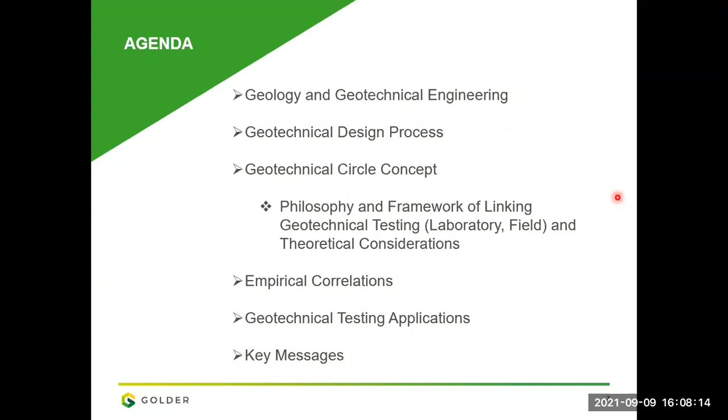So the presentation will first talk about the role of geology in geotechnical engineering, quickly discuss the geotechnical design process, in particular a concept I call the geotechnical circle concept, which is a framework linking geotechnical testing, whether in the laboratory or the field, along with theoretical considerations. I'll provide some thoughts with regard to empirical correlations, present some geotechnical testing applications, and end with key messages that I'd like you to take away from this evening's presentation.

Almost 90 years ago, Karl Terzaghi wrote in a paper that it took him two years of strenuous work to discover that geological information must be supplemented by numerical data, which can only be obtained by physical tests carried out in the laboratory. I think this is one of the first statements on the importance and role of laboratory testing, but I would also extend that into field and in situ testing.

Karl Terzaghi and many other geotechnical pioneers always based their work on the background of geology, and they stressed the importance and necessity of linking geology and geotechnical engineering.

Another example is Robert Legget's book from 1962, Geology and Engineering, in which he discusses the important interrelationships between geology and geotechnical engineering. If you've not had the opportunity to read this book, maybe not all in its entirety, but certainly some selected sections, I think you will find it to be a very interesting and informative read.

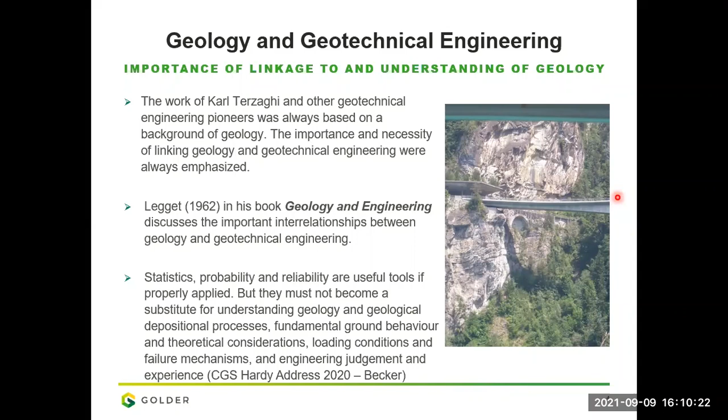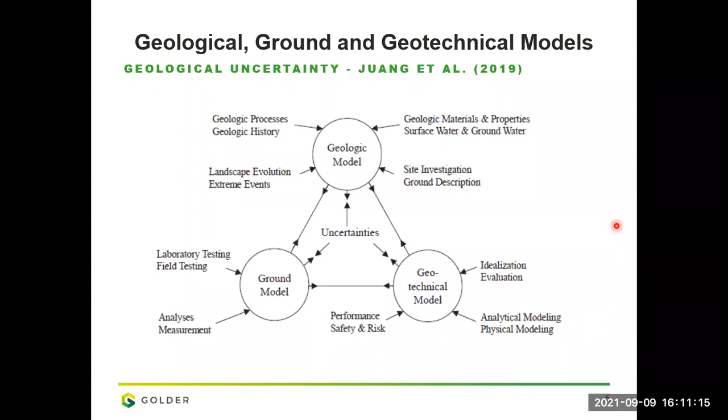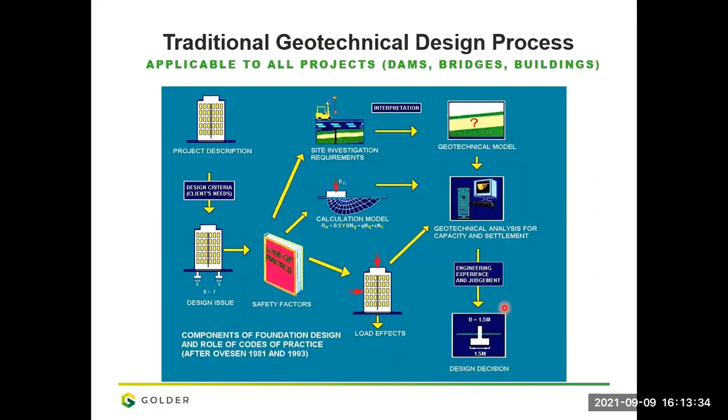And when that input is put into your analysis, etc., and you get a result, you apply appropriate engineering experience and judgment, and you will then select the appropriate design parameter, or what the design would be—in this case, a footing. So testing is embodied in the design process.

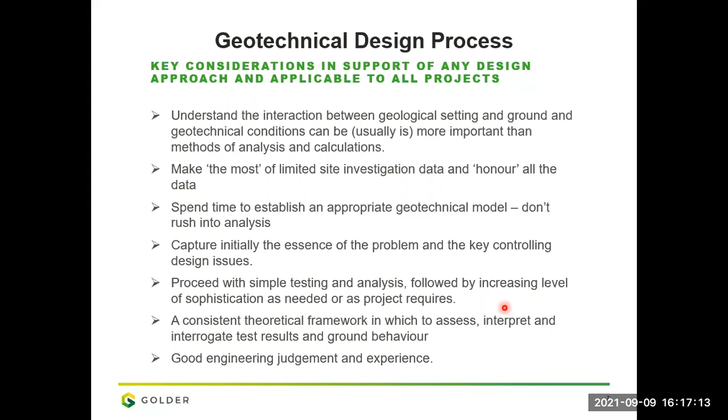interrogate your test results. And then finally, good engineering judgment and experience is always important. Because as they say, good judgment is usually the result of experience, and experience is frequently the result of bad judgment.

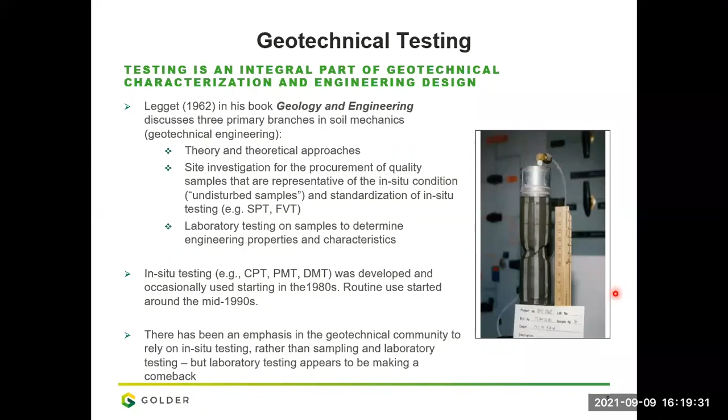I think people, when I say people, us in the geotechnical community, are realizing and reestablishing the value of high quality laboratory testing.

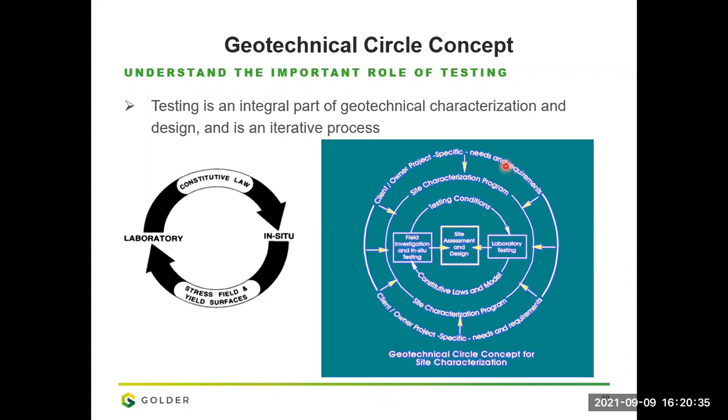Legget's comments about those three branches, the theoretical considerations and that type of thing, fit into what I call the geotechnical circle concept, where you have a relationship between laboratory testing, constitutive laws, results of in situ testing and theory, and then the results feed back in an iterative or circular approach. Or another way of looking at it is like layers of an onion, starting from the outside, working in, understanding the project needs, developing a site characterization program, and then setting up testing conditions that feed into field testing and also into site assessment and design.

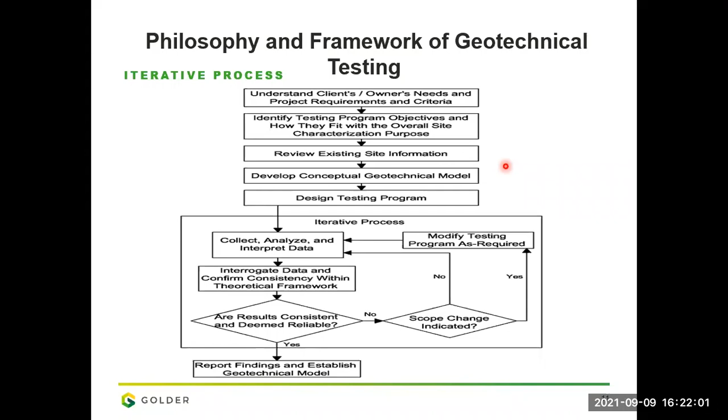I have a few key messages about what I consider constitutes a meaningful or value-added test program. The first is that it's important to understand the advantages and limitations of the various tests, whether they're in the lab, field, or in situ.

The next point is that you need thoughtful and adequate planning based on a good understanding of fundamental ground behavior, working within that theoretical framework. The third bullet is that what you get out of a testing program and how valuable it is, is commensurate with the degree of thought and attention you put into it. Frankly, if you don't put much effort into thinking about it, you should not expect too much back. But if you think carefully and understand the role and purpose of each test, you end up with meaningful program results.

It's important to simulate the in situ and loading conditions to the best and fullest extent practical. An example would be testing in your field stress range, or if your pore water has salinity and things like that, you should try to match that in your laboratory testing.

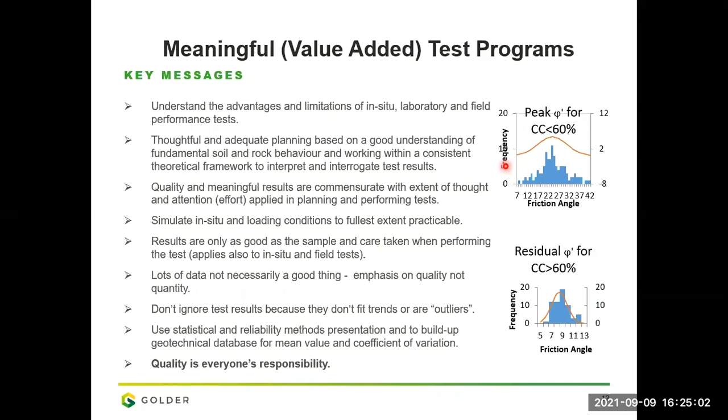I'd like to now talk about examples of testing supporting the development of theoretical considerations and applications in practice. A side thought is that high quality, good test data results stand the test of time.

The first example is the state parameter approach, which I think everyone is familiar with, and it's very important for the fundamental understanding of sand behavior. It was developed in the 1980s with work by Mike Jefferies, who was with Gulf Canada at the time, and then Ken Been and others from the Golder Calgary office.

The key part of this understanding was to make it applicable to the field, and that was developed through the use of CPT, cone penetration testing, where results using tip resistance and other parameters would give you the state parameter. Typically now it's recognized that a state parameter value of negative 0.05 is the boundary between contractive and dilative material. But again, this was developed on the basis of testing and having a good theoretical framework in which to operate and interpret the test results.

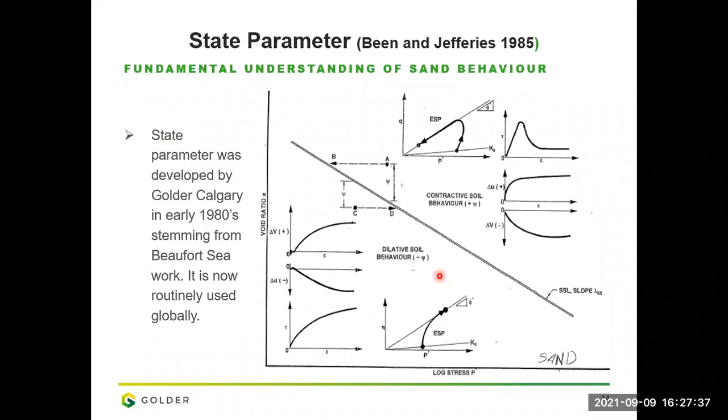Another example is yield envelopes, which provide a consistent framework for assessing clay behavior.

If your stress state stays within your yield envelope, you're in an over-consolidated state. Strains tend to be small and behave more elastically, but once your stress level exceeds the yield envelope and you're on the other side of it, you're in a normally consolidated state with higher compressibilities, a decrease in coefficient of consolidation, and other factors.

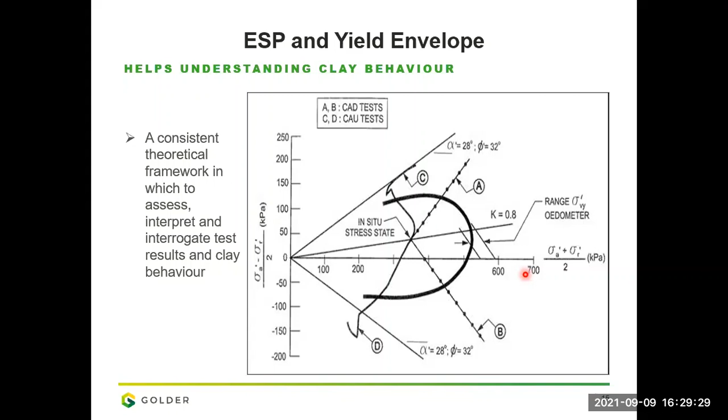If you could track in situ, based on piezometers and other things, and actually develop field stress paths, it goes a long way in terms of understanding your state of stress in the soil and where it is with respect to failure. It's recognized that the average mobilized undrained shear strength is basically controlled by preconsolidation pressure.

Typically for soils, it's recognized that 0.22 times the preconsolidation pressure gives you a good value of average mobilized undrained shear strength. This value came out of the work at Laval with Tavenas, La Rochelle, Serge Leroueil, and others, based on the St. Alban test fills. Mesri, in the early 80s, also theoretically developed a relationship, and his number was 0.23, which is close to 0.22.

This relationship also fits into this equation, which is really the SHANSEP equation, where your undrained strength ratio with respect to effective stress is a function of your normally consolidated strength ratio and OCR.

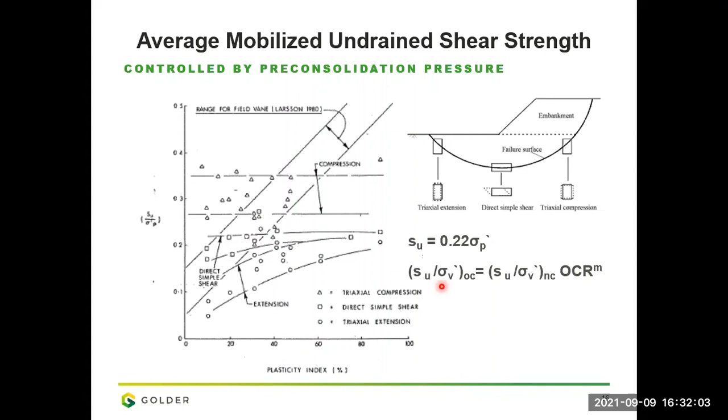Of interest is the field vane test, which trends up and to the right as a function of plasticity index. An important observation is that if you're in the plasticity index range of 20 to 40, field vane tests will be close to your direct simple shear value, which is close to the average mobilized undrained shear strength.

A few comments about direct simple shear testing. Constant volume direct simple shear testing is probably the most commonly used now in state of practice. But it's important to recognize that constant volume direct simple shear tests are not truly undrained tests. Many people, myself included at one point, used to think they were undrained tests, but they're not.

They're a proxy to, or equivalent to, an undrained shear strength, on the basis of constant volume. In most apparatus, pore water pressure is not measured, rather it's inferred based on the change in applied vertical stress needed to maintain a constant volume, and that's taken to be equivalent to the pore water pressure.

This is a bit of a pet peeve of mine. If you're reporting constant volume direct simple shear test results, I sometimes see reports list 'measured pore water pressure,' and people may say, Dennis, don't be so pedantic, but it's important to realize this is inferred, not actually measured. What was measured was the applied vertical stress to maintain constant volume, and through the effective stress equation, that is interpreted to be the pore water pressure.

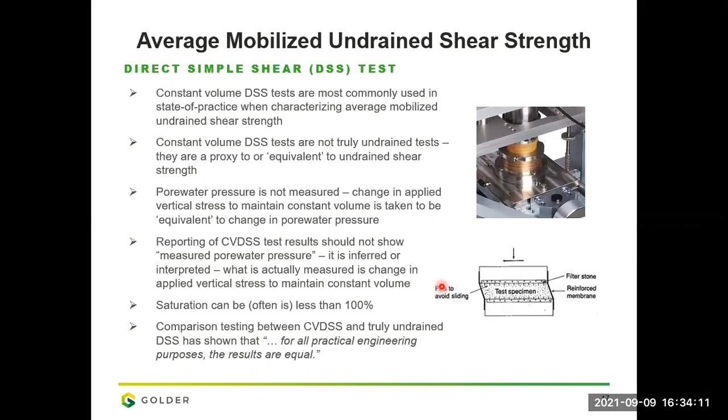I'd like now to share some thoughts about empirical correlations. Geotechnical engineering is embodied with the use of empirical correlations. They're very much a part of our history and tradition, and they're very useful, but you need to understand the basis of development and limitations. I think you should only use those that capture the essence or the first order controlling effects, and that'll become more clear in subsequent slides.

You should have a theoretical basis or a physical understanding of what properties you should expect to be related. Why are you correlating this value with this value? I think it's important to correlate undrained response to tests that are undrained in nature, and same thing, if you want drained parameters, you should correlate them to drained responses. I see many correlations where it's an undrained test and you're going to drain parameters such as effective friction angle, and perhaps the values look all reasonable, but I think there's a bit of a disconnect.

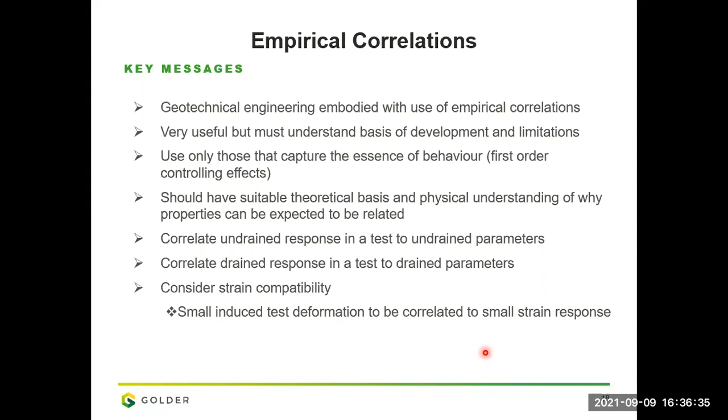It's also important to consider strain compatibility in terms of the deformations. An example of this would be the dilatometer, which applies a very small strain displacement to the soil. I think it's appropriate for values of K0, because it's that small strain. And even though the correlations may be consistent with others for large strain behaviors such as undrained shear strength, you have to keep in mind it's a correlation, and you're using a small strain test to predict or estimate large strain behavior.

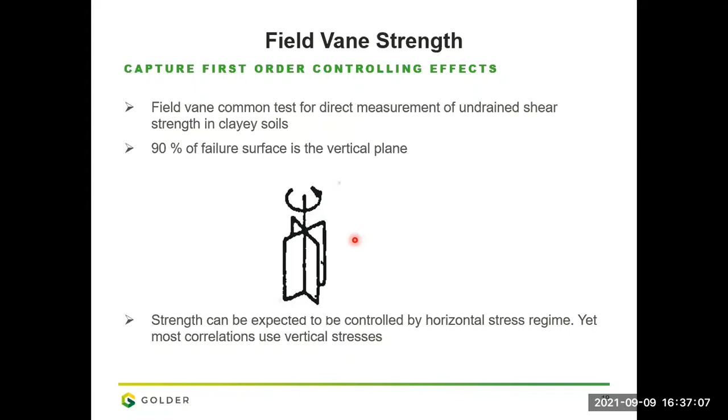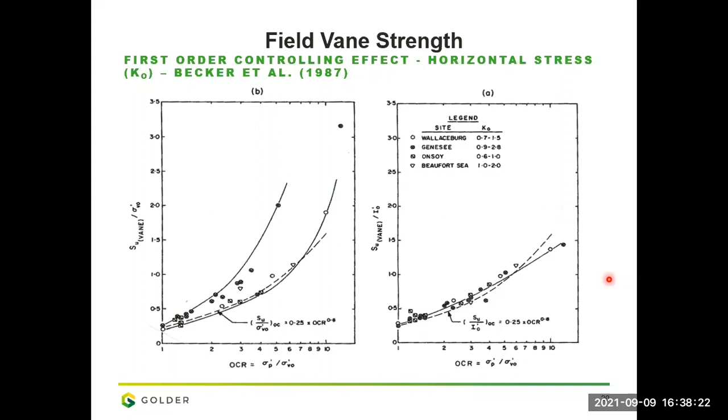But for particular sites where I was able to measure K0, I could normalize the vane strength with regard to mean effective stress, which takes K0 into consideration. When you plot this same test data against vertical stress, and then against mean stress, you get this very tight correlation. I think that is an indication that you're now starting to capture the first order controlling effects, and for the field vane test, it's the horizontal stresses that really are controlling the strength.

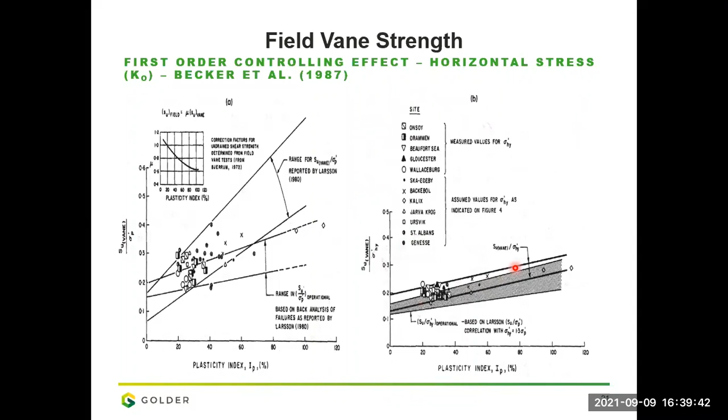So the same plot data here is then plotted on the right-hand side of this plot, but instead of preconsolidation pressure or vertical yield stress, it's in terms of horizontal yield stress. Again, you can see the scatter in the data is very minimal now, which to me supports my hypothesis earlier that it's horizontal stresses that are really controlling field vane strength.

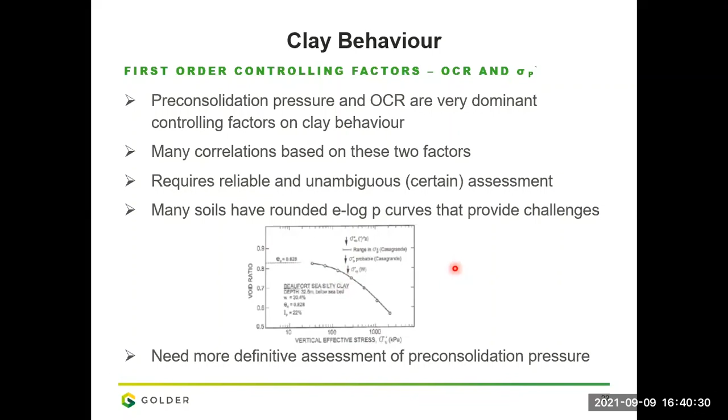Preconsolidation pressure and OCR are very dominant controlling factors on clay behavior, and there's many correlations related to preconsolidation pressure and OCR, but that requires a reliable and unambiguous assessment of preconsolidation pressure. Many soils have a rounded E log P curve, and if you apply the typical Casagrande type of interpretation, it's very difficult to determine the point of minute maximum curvature and estimate the preconsolidation pressure. So you really need a more definitive assessment of preconsolidation pressure.

This work led out of work that we did in the Beaufort Sea in the early 80s, where Beaufort Sea clays had very rounded E log P curves, and it was important to come up with a more definitive assessment. At that point, I developed the strain energy, or the work done on the oedometer test.

It wasn't that I woke up one morning and said, okay, let's do something innovative and unique today. It was rather that I was in the lab. In those days, we did a lot of our own testing, running a series of consolidation testing and triaxial testing. I was reading some papers on strain energy, by Jim Graham and Francois Tavenas and others, and they were determining yield stress in triaxial, which has three dimensions.

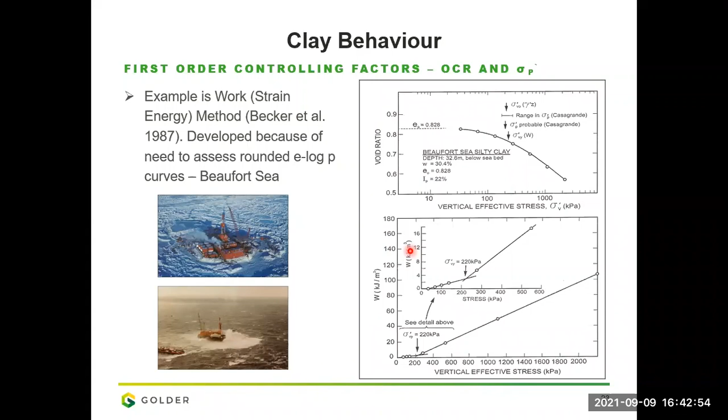Preconsolidation pressure, which is very important when you develop your correlations. I have to say, without trying to blow my own horn, one of the rewarding times in my career was when Professor Charles Ladd at MIT called me and said that they now routinely use this approach in all of their research work. But anyway, enough of that. I'll just say, if you haven't used this approach, I encourage you to do so, and hopefully you will find that it is meaningful and informative.

This plot shows the relationship for a site in the Beaufort Sea, Amauligak, where the squares are the results from the pressure meter testing, and the circles are from the odometer tests on vertically trimmed samples. Now they're not identical, but they show the same shape and profile. Here's an example of an outlier that I couldn't dismiss, so I had to keep it in the plot. But the point here is that just thinking about the stresses, from a practical sense, and using simple laboratory testing, you can get an assessment of K naught.

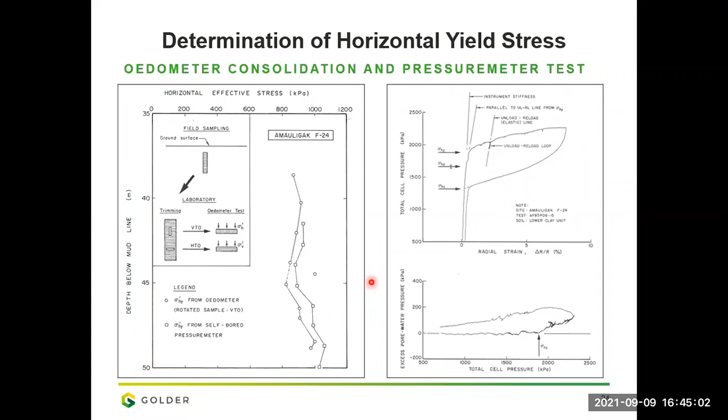It's well known that preconsolidation pressure you can get from tip resistance, the classic equation where the preconsolidation is a function of the tip resistance minus total vertical stress, and typically F varies from 0.28 to 0.33.

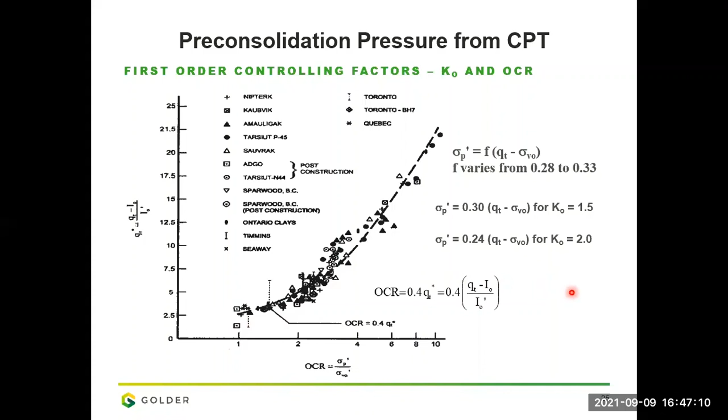This upper value that is typically used and reported in the literature is fine if you have your normal range of K naught. But once K naught is higher, this particular value drops. So this is a useful correlation which captures what I consider the controlling effects, or the controlling orders, of what controls the behavior.

Coming back to the field vane, where we typically come up with an NK factor to use so that you can use your CPT tip resistance to calculate undrained shear strength. I think everyone knows and realizes that this value of NK can vary considerably, from just a bit above 5 up to about 20.

This plot shows it related to K naught. So if you're in your normal range of K naught, you tend to have values that you'd probably recognize in your own practice, values of K naught, values of NK. But if you're working in higher K naught materials, then this NK value can increase.

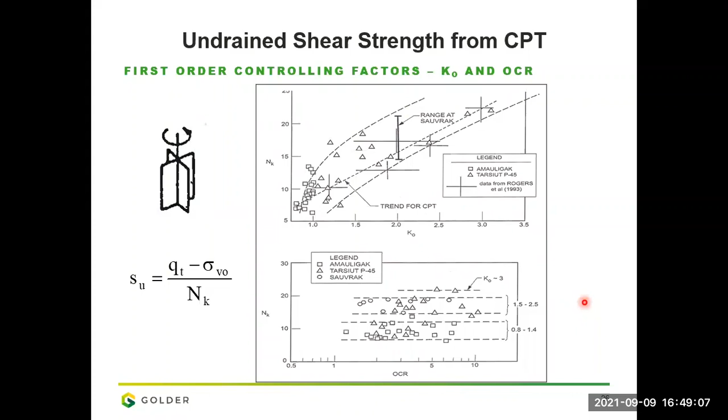The bottom figure here shows the relationship between OCR and NK. It shows that NKT is relatively insensitive to OCR, because all of these symbols are more or less in a line, but these are values of K naught in the order of 0.8 to 1.4. You'll see these are sort of your typical numbers for NKT, maybe 13 or 14, that many of you have probably used in your practice. But again, this is to show some controlling factors with regard to the horizontal stress regime.

So let's talk a bit now about field performance testing, such as full-scale pile load tests and those types of things. This testing is essential for design improvement and to make your design more efficient, especially for what I call geostructural elements, such as ground anchors, piles, and ground improvement technologies. The testing also plays a key part in QA/QC programs.

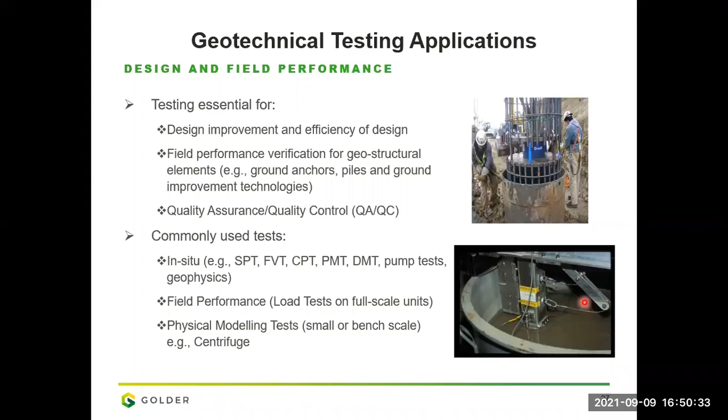The commonly used tests for these are ones we're all very familiar with, but we can add pump tests and geophysics to it. I think a lot of geotechnical characterization programs could benefit from more use of geophysics, not only downhole, but surface seismic waves, to get a better sense of your ground model. Then there's full-scale field performance tests, and physical modeling tests on a bench scale, such as a centrifuge.

For full-scale field performance tests, they provide an improved understanding of the soil structure geostructural system. They certainly provide design efficiency, because with testing you can use higher geotechnical resistance factors in LRFD, or lower factors of safety. But it's important to realize that if you want to refine your design, you really have to take your load tests to failure, so you obtain the ultimate values of the geotechnical parameters for a pile, whether it's skin friction or end bearing.

Because once you know the ultimate value is when you can refine your design. If you don't take your test to failure, then it's really only a confirmation or proof of design test, but it doesn't allow design refinement. It confirms that your design parameters are okay and you get satisfactory performance for the test range stress that you considered, and you'll have a higher degree of certainty doing a proof test. But if you want to refine your design and have the highest degree of certainty or reliability, taking your load tests to failure is the way to do that.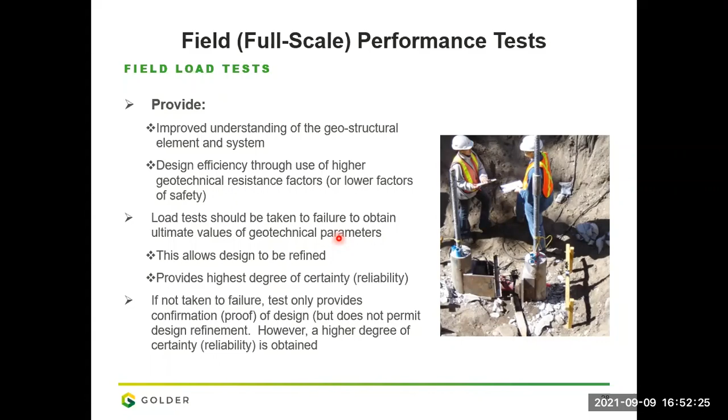People recognize the figure that's O-cell testing for caissons or drill shafts. And the codes, as most people know, allow you to increase your resistance factor from 0.4, if it's only based on static analysis, up to 0.6, and now even higher for full-scale tests. That's a 50% increase in your pile axial resistance. But you have to keep in mind that doesn't necessarily translate into 50% cost savings of the overall system, because there are other factors such as pile spacing and redundancy that need to be taken into account. So you would reduce the number of piles by having a higher resistance factor, but the total cost savings isn't commensurate with the increase from 0.4 to 0.6.

Field performance tests are expensive, but they can provide significant cost benefits. An example of that is the upper part here, without a test. I'm fairly confident with the solid line I've drawn here, but the dashed line reflects that I'm estimating what the ultimate shear axial compression resistance will be. If that's all you do, you'd multiply that by 0.4 to get your design value. Now if you actually did the full-scale test, and in this particular case the measured value is higher, you then get to take 0.6 of that value. So you've ended up with a substantial increase.

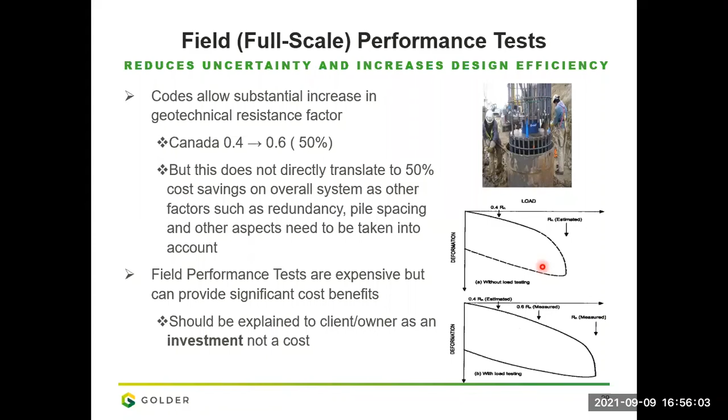And occasionally the results come in lower than what we thought they might have been, and they were disappointed. But even though they were disappointed, they understood that they've done the testing, so now you have to work with that particular result. I make that comment just as a practical thing, because in my experience, a lot of times people do more testing because they feel they're going to get a higher number and therefore their design can be more efficient.

Physical modeling tests are needed because the complex nature of the ground can't be captured sufficiently by analytical and numerical methods alone. They provide an improved physical understanding of the key failure mechanisms and deformation, assist in assessing construction processes and soil-structure interaction, and assist in calibration of analytical and numerical models.

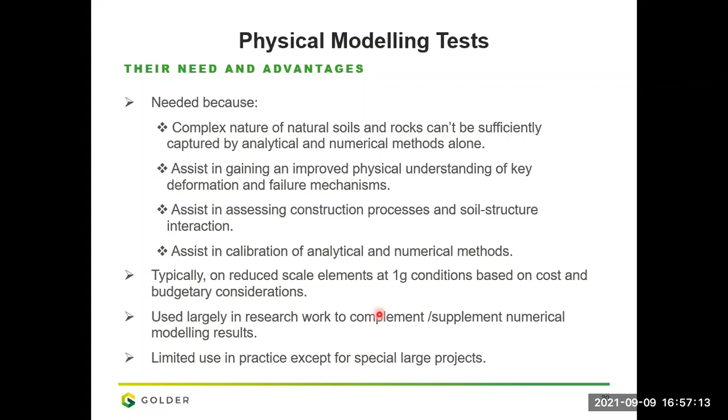Typically these tests are done at 1G, basically because of cost and budgetary considerations, and they would do that largely on a group of model piles that are centimeters long as opposed to meters long. So they're largely used in research work to complement or supplement numerical modeling, and have limited use in practice except for some large special projects.

Some examples of physical modeling tests: I already mentioned single and pile group behavior, including static and cyclic loading. Frost heave forces on pipelines in Calgary - we have a cold room and can test large scale setup with pipe and frozen soil to measure that interaction. We've done work with iceberg scour studies and flume testing for tailings deposition.

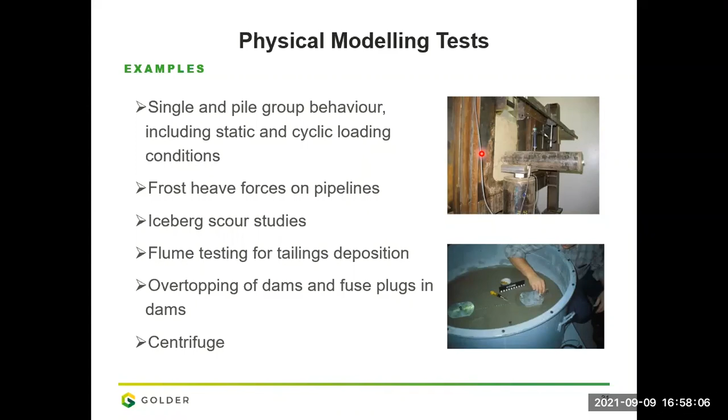There's some recent work being done in terms of better understanding dams, overtopping of dams, and fuse plugs, through the use of physical models and also the centrifuge.

The centrifuge has certainly increased its use over the past 25 years. It has many advantages in terms of producing a higher stress field that helps model the actual stresses that the pile would feel in the ground. In terms of advective flow, it has the advantage of significantly reducing modeling time to assess advective flow. Again, at this stage there's limited use in practice unless you have a very large project, but I certainly was fortunate to get a chance to see the benefits of centrifuge testing.

Those of you who attended the last in-person conference in St. John's will recall I related a story where Jack Clark chastised me for my skepticism of what the centrifuge could do.

He was an advisor on the Confederation Bridge, and it certainly did help us with our improved understanding of failure mechanisms, especially for the footings that were subjected to very high ice loads, which resulted in high load eccentricities and inclinations. But the value I took away from it was that it helped identify when simple 2D finite element analysis was sufficient, or when it was necessary to get into much more sophisticated 3D finite element analysis.

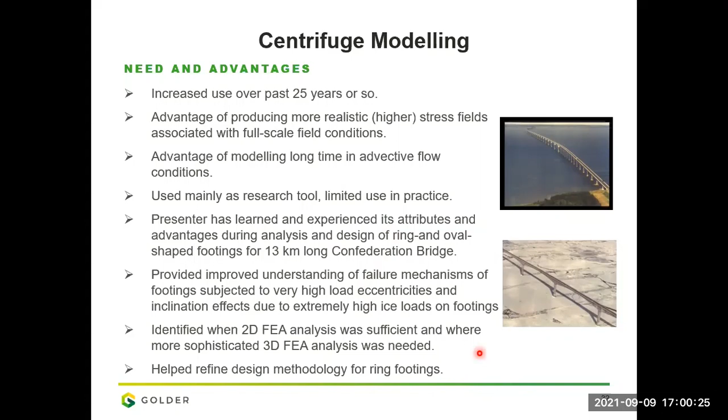So I thought the interaction of theory and the results from physical testing was certainly very useful.

So, last couple of slides here. I'm not sure how I'm doing on time - yeah, probably running over.

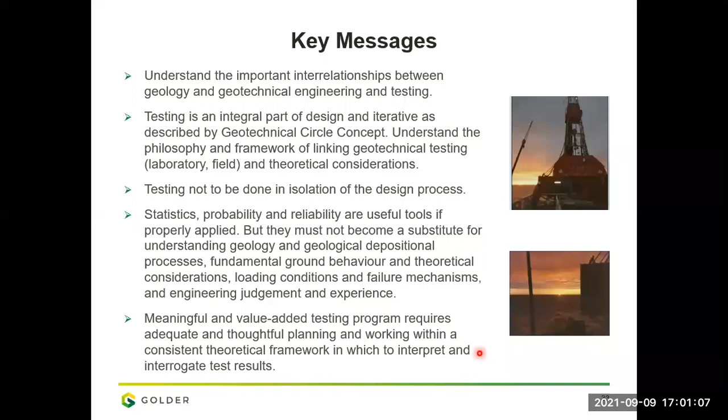Understand the important relationships between geology and geotechnical engineering. Testing is an integral part of the design and is used in the geotechnical circle concept. Testing should not be done in isolation. Meaningful and value-added testing programs require careful and adequate thought and interpretation within a consistent framework.

High quality test data results stand the test of time. It's very important to understand the limitations of tests and which tests are applicable. Use and develop correlations that capture first order effects. Undrained test response should be used for undrained parameters.

My final takeaway message for you is that if you want to refine your design, it's important to take your field performance test, pile load tests, to failure.

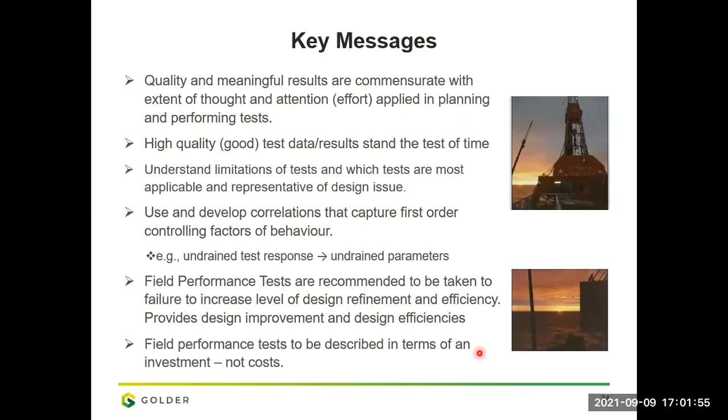Thank you very much, and sorry for running over time, but once I get started on this particular subject, and since I can't see everyone in the audience, I can't take hints that it's time to stop. But anyway, I have stopped, and I'm willing to take questions if time permits.

Thanks, Dennis, much appreciated. I don't see questions in the chat line, but to break the ice, I have a question for you.

So you mentioned the pile test that can increase the geotechnical resistance factor by 50%. However, we do not have the same codified reward system for other geotechnical testing, maybe except for the Canadian Highway Bridge Design Code that introduced the degree of understanding of the geotechnical system. But do you believe this is the way forward?

Sorry, Gennaro, you were coming in loud and clear earlier, but now you seem to be broken up, though I think I caught most of the words. Yeah, I think you were talking about the latest edition of the Canadian Highway Bridge Design Code, where we also got into consequence factors and the degree of understanding.